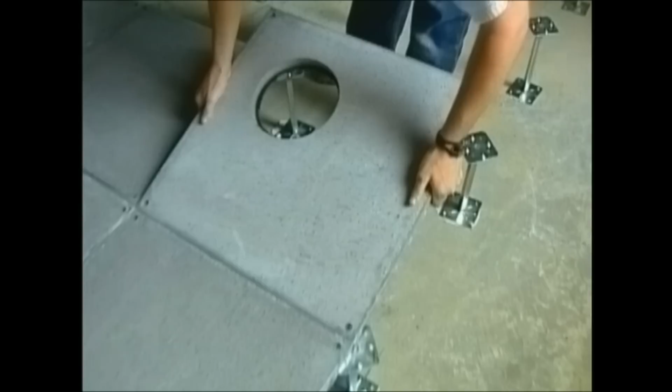We don't have to pay the price for a throwaway society. Let's not waste all those foot candles. It's total systems integration. We're creating cultural institutions. Clearly, you can make an impact if you can get to the major players.

South Central was our first major green project, and I think it was a learning experience for the Commonwealth, certainly, as much as it was with the developers and the architects and so on. Let me ask you a question or two on this from the occupant's point of view.

The introduction into high-performance green building design for me really started with all stakeholders and design professionals - engineers, manufacturers, client, owner, architect. It's critical that the owner and/or occupants, in some cases tenants, are part of that design process.

Jim, I think it would be really critical for this team to get together again in 5 years and find out. I was sitting back not very long ago just trying to talk about what is different, what has changed. No question about it.

This was the defining project in terms of what was going to happen in the Commonwealth for green buildings in the future. Everyone's life changed. This project was sort of the fulcrum where things came together and started working kind of in motion.

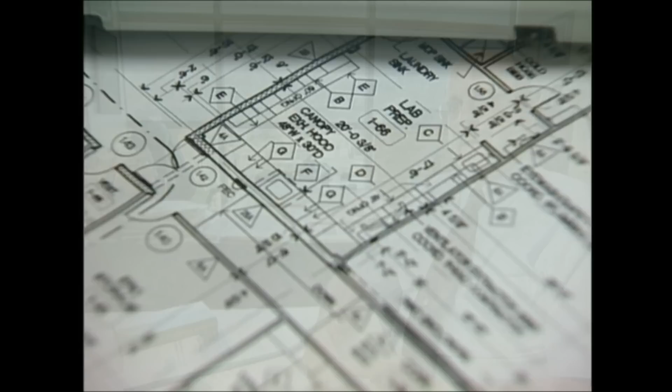5 years ago, we were bringing this to all of our clients. More and more, our clients are bringing it to us and saying, hey, this is what we want. Do you know how to do this?

Miller Brothers owns the building. It's a lease project. DEP was involved intensely from the start. They came to us with the specifications of how they thought a green project would be put together.

The main leader on the project, Jim Toothaker, made this tremendous transformation from the first time I met him, where he was kind of looking at me skeptically like, what's this soybean stuff, to sort of standing up at a meeting and proclaiming that he was going to change the way things were done.

We're able to, in many respects, drive the process of what the final outcome of the building is and what the quality of that building is.

I experienced government stating who we are as a people, not just regulating who we have to be as a people. I think Pennsylvania and a lot of states moved from the old way of doing environmental business.

What we've done in Pennsylvania is really build green building into our building specifications for what the state purchases. It becomes part of the regular business that we do. And I think as we do more of these projects, we're going to serve as a great example for private industry. All of us. What is a green building?

Some folks thought it was material selection, some folks thought it was energy, other folks thought it was site issues. This project - LEED really says, okay, it's all of those.

The more we begin to integrate these systems, the more you need a commissioning agent.

When Steve, who was leading the team at the time, presented this terminology of integrated systems design, we all got it, it all made sense, but I don't think we really knew how to do it or how to go about it. We had this excellent green team of consultants working on the project, but they got started very late. An awful lot of building construction and design is still being done the way it was 20 years ago.

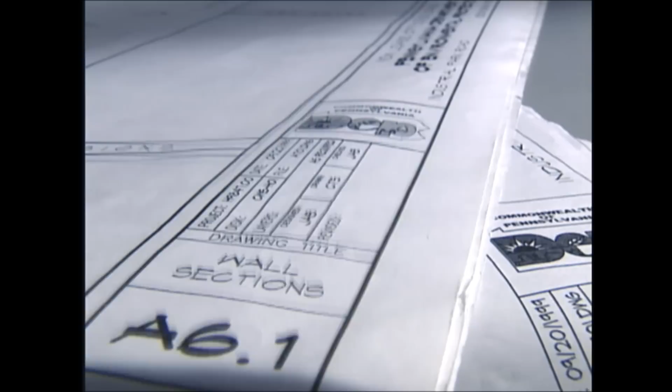I've almost come to accept the serial style of executing a project. Everybody goes off in their own little world and designs their own little system. They throw the drawings over the wall, they end up in your cubicle, and you work on them, and you throw them over the wall to the next guy. And then they all come back together at the end just to make sure it doesn't all run into each other. And that whole mentality we pay for in mistakes and inefficiencies.

The shift in thinking is that the architect's role, honestly, is to ask more questions initially than to give answers. Don't muck up the process deep into construction. I think that's a real problem. I'm not sure, and that's part of my point.

Draw out from everybody their level of expertise to apply it beyond their normal area of purview, so that instead of the standard linear way of designing projects, you can put all those systems together three-dimensionally into a holistic process. We're being asked in many ways to stretch a little bit outside of our normally focused area, and for many people like me, that's really exciting and interesting.

We did a pretty decent job at South Central. The problem that I think we had was a lot of these systems weren't optimized and they weren't designed to try and all work together.

Marcus has this great question: how does simply selecting your paint color impact the sizing of your HVAC system? If you can just increase the reflectances of the surfaces in the space, that will provide more efficient illumination to that space. It's just one little number, just a shade difference in the paint, which minimizes the amount of energy that goes into those lights. It reduces first cost because you're pulling light fixtures out of the building. And then it also has an impact on the HVAC system because there's less heat going into the building.

I remember specifically the meeting where we were reviewing the mechanical systems and how we're going to get this distribution system from that location out into the building. And John just basically turned to me and said, okay, where's the best place for the mechanical room? The engineer's response to that was momentary dead silence. I felt like a deer caught in headlights, like, oh my gosh. It was a much different environment than he was used to working with.

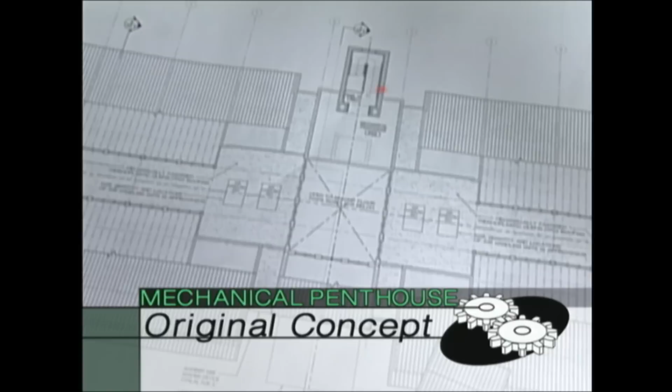Insulation value, we're trying to get R30 in that roof. The whole construction process of the green technology really was a learning curve for us for the whole project. From the beginning, everything can be integrated and sized down, if you will. The building was split east wing and west wing, where we installed 2 separate mechanical rooms.

As it turns out, it saved us a significant amount of money counterintuitively by utilizing first floor space, because now we had minimized the duct runs, weren't building the penthouse, stairs, access to it, the whole bit. I think what that ended up being was about a $20,000 to $30,000 savings, did we calculate? I forget, it was more like 40. Forty, that's right, that's what it was.

So what we want to do, I think the way we have this designed, is we're going to take out all this. The two sites between Cambria and South Central were very different.

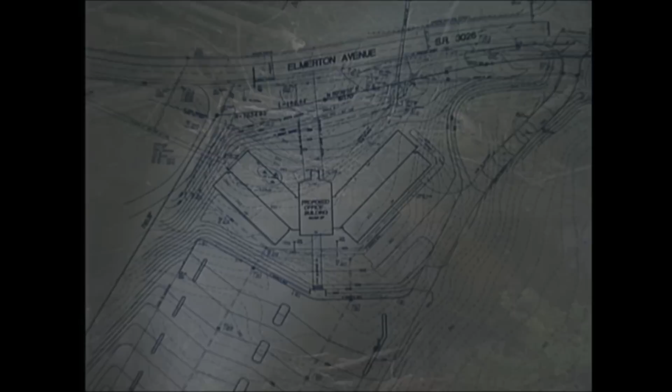South Central was a brownfield site, a landfill for the debris from Hurricane Agnes. Choosing that site has been restorative from an environmental point of view in terms of some of the other damages that have been done in the past. We had the ribbons in the tree.

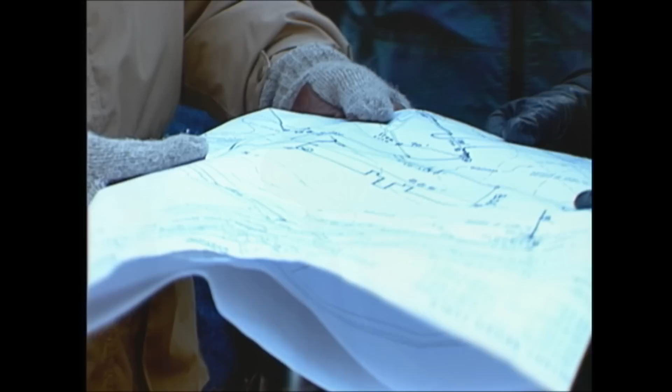Cambria was a site that hadn't been built on prior to the development for this project in an industrial park. We purchased 9 acres, 3.5 acres of that was already wetlands. Wetlands is through here. So we worked around preserving those wetlands.

Forested wetlands are common in Pennsylvania. They are characterized by trees and shrubs. Wetlands are a type of ecosystem that provide habitat for certain types of wildlife and for reptiles. But they provide a value and function not easily measured, such as flood control, retaining pollutants from going into the environment.

You need to first take a look at the site during the proper times of the year to evaluate whether the area is a wetland and how you can avoid impacting the wetlands or minimize the impacts. And if those can't happen, you can mitigate any impacts you may have.

We wound up redesigning the facility so that we could put the facility in without any disturbance of any of the wetlands. In addition, the stormwater systems were designed to put water into the wetlands and recharge the wetlands.

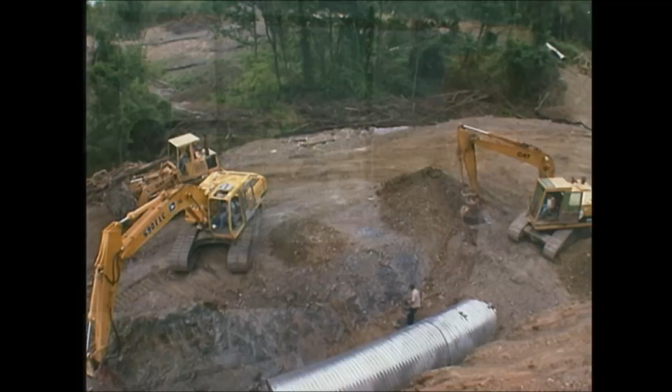I would be hard-pressed to take a choice between a brownfield and a location designated to be developed that has all the infrastructure in place but may not be a brownfield. I think either of those are almost equal choices. But you won't find any of DEP's facilities out on new greenfields.

Light pollution has emerged as a problem that LEED addresses. If you look at the Earth at nighttime, you can see quite clearly where development has occurred. You've got parking lots that look like football stadiums, overlit. All we did was try to meet the recommended illumination levels for parking lots, and the only other thing we did was try to use cutoff fixture mounts, which allow for that illumination to be cast down rather than out.

How about water saver toilets? Gee, we have to flush three times. Are they really working? You just create them in a way that they work. It's like any piece of equipment used properly.

Pennsylvania has a lot of water as a state. It's abused in terms of... Even though we have a lot of water compared to many areas, let's not wait till we don't have any water before we start doing something about it.

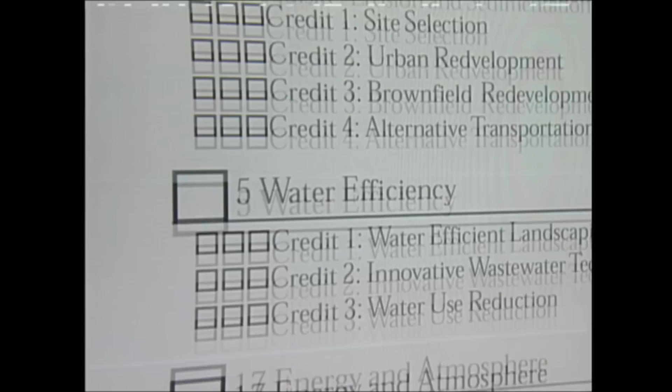Let's start doing something about it consciously now. LEED addresses this in their water efficiency credits. The goal in this case was to reduce water consumption by 30% relative to the requirements of the Energy Policy Act of 1992. Interestingly, the 30% goal is not that difficult to achieve. We did it by really doing three things.

The big difference, I think, was the introduction of the waterless urinals. Number one, waterless urinals—it's a standard in most Department of Defense projects now. Number two, push rod automatic faucet controls, which reduce hand washing water by about 40%. And number three, using, in this case, low flow shower heads.

Well, what's that really amount to in an office building? Let me give you an example of what it amounts to. The water company has visited with us on two different occasions at this point at the Cambria office, wondering about the water consumption for the building, because our monthly water consumption is the equivalent of 1 to 2 residences in the area, and this is for an office building that houses 125 people.

The difference between the two projects is night and day.

This is still facing west before it's got sun. On South Central, we were able to reduce the amount of energy that the lights use. We put in high-quality lighting with indirect lighting, used high-reflectance ceiling tiles, and incorporated some daylighting into South Central.

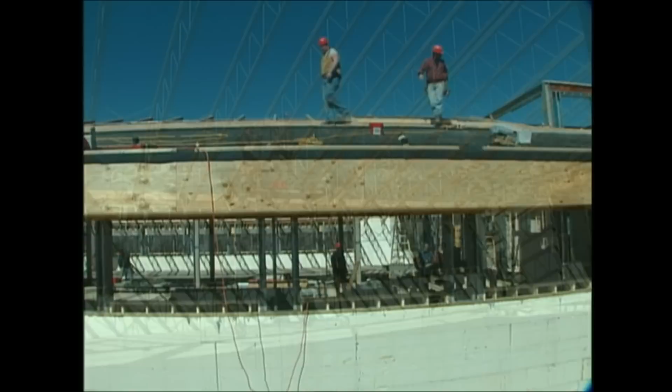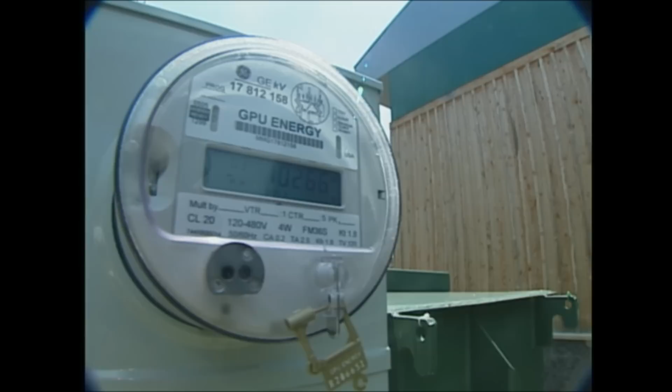On Cambria, we took it a next step. From a performance standards point of view, the most important one, and the one we start with, is that we've established an energy budget for the entire building—the light load, the plug load, and the HVAC load—that when it's all put together, can't exceed a certain amount of BTUs. At the moment, it's 40,000 BTUs per square foot annually. Let's design a building that will reduce energy consumption by 50%. That's where we like to start.

The very first thing is solar orientation. We don't light up our buildings like a Christmas tree. We orient the buildings so that they can take advantage of the sun. You can look at Anasazi and Pueblo Indian dwellings in the southwestern United States—they knew it makes sense energy-wise.